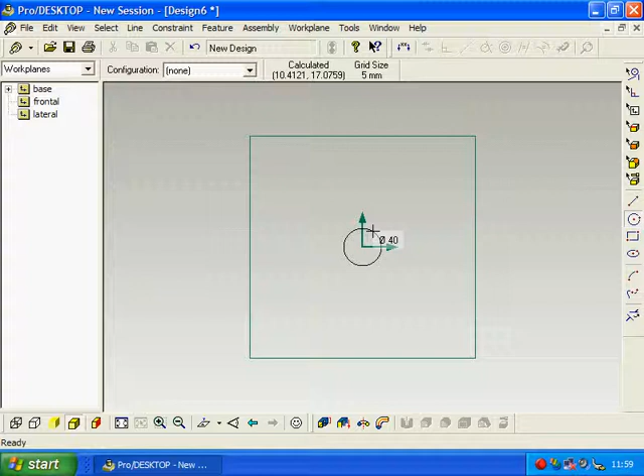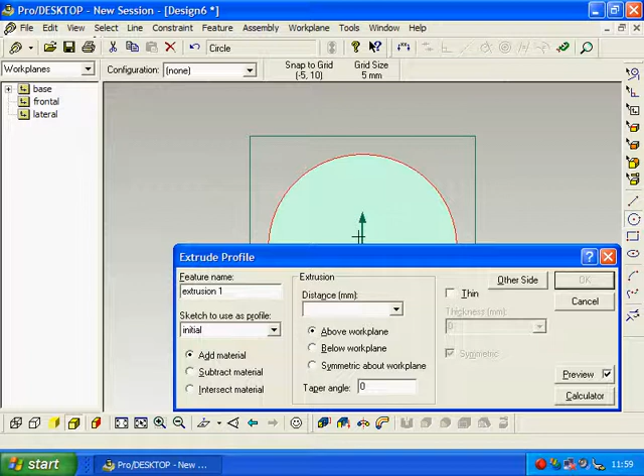So click on the circle tool on the right hand side, and we're going to draw a circle from where the two arrows meet, and I'm going to go about 200. And then I'm going to go to Feature at the top and Extrude. Feature Extrude, and we'll extrude it about 40. But rather than it being above, I'm going to use symmetric about work plane, so I'm going to click on that option there. All the rest stays the same, add material, extrusion 1 initial, and we click OK.

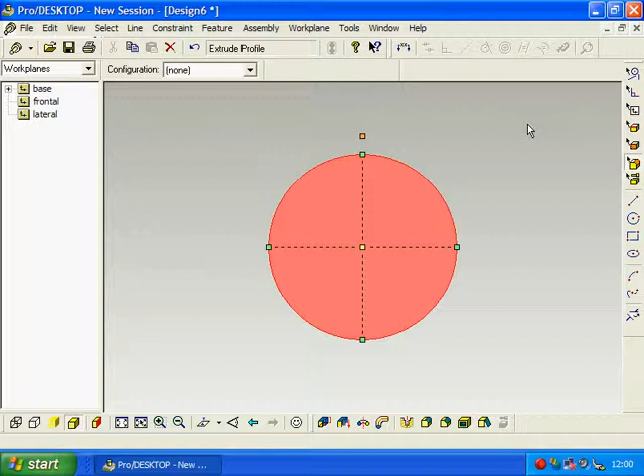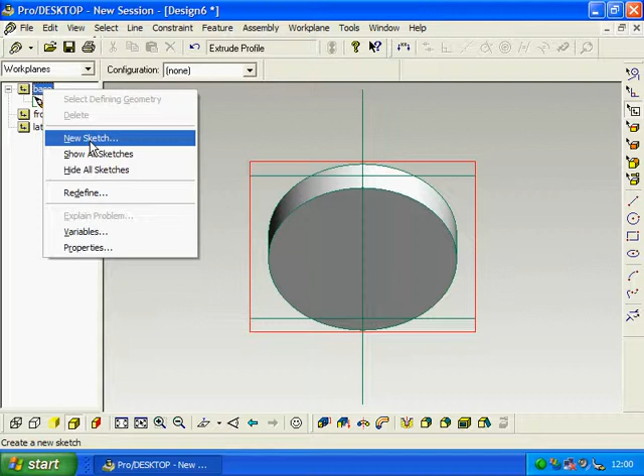So that's the first part of the job done. We've got our circle extruded, and if you have a look at the line, it's gone symmetrical about this line, so it's the same at this side as it is at this side. Our work plane sits in the middle. Next step, I'm going to add another sketch on the base work plane. So I can right click on base on the little yellow square and add new sketch. This is going to be our construction line. And I click OK.

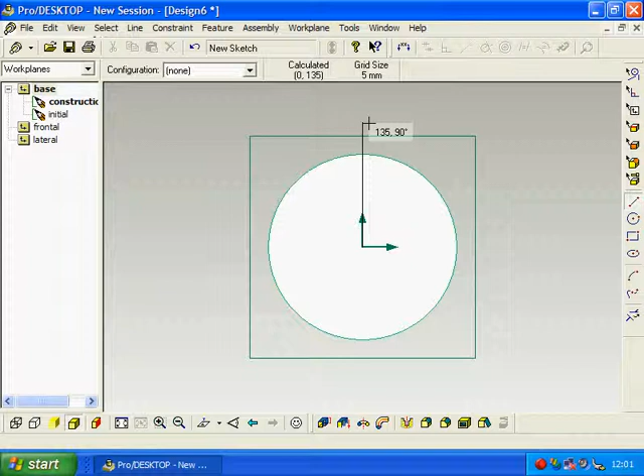Again, Shift W, and I'm going to click on the line tool. I'm going to draw a line now. This is going to be our line of symmetry for the tooth of the gear. So draw a line straight up, doesn't matter how high you go, just as long as it's above the circle. Click on line, and we're going to toggle construction line; everything there is under the line tool. And we're going to lock it in place, toggle fix lines using the little G clamp. It should be up here, and that puts a little triangle in the center, and that locks the construction line in place so it won't move around.

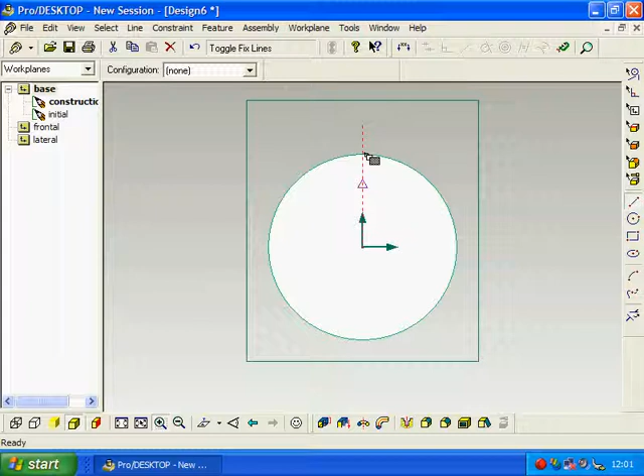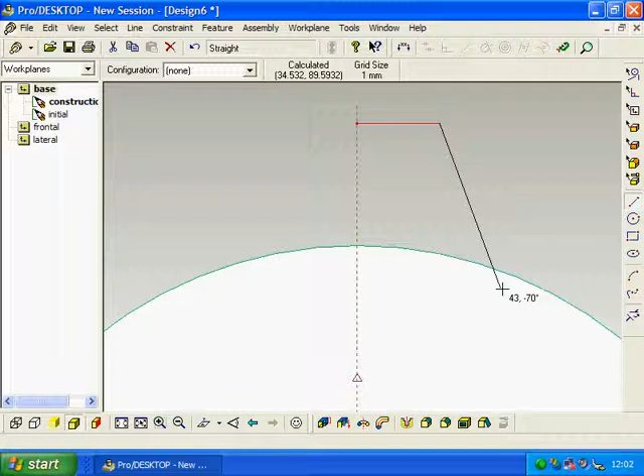I then need to draw the tooth, so I'm still going to work on this construction line layer, and I'm going to zoom in using the little magnifying glass up at the top. I'm going to draw one side of the tooth. So using the construction line as a guide, Shift key to keep it straight. We'll do a horizontal line and then a diagonal line coming down. Try and get it so it goes past and inside the circle rather than snapping to the edges. As you can see, it snaps all over the place. So come past and inside the circle. Then I'm going to do a line again back to the construction line.

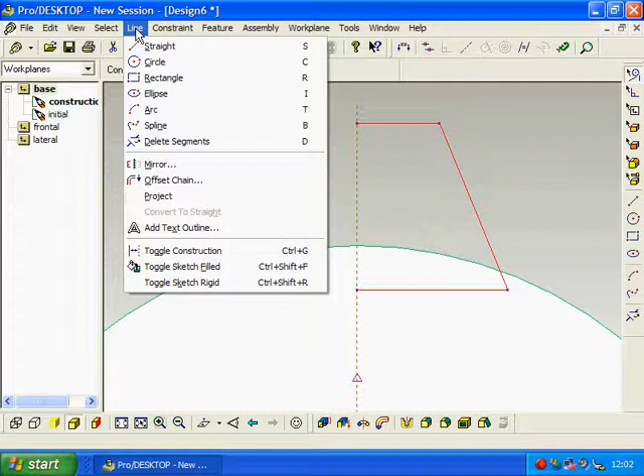I then need to select these three lines, so using the select lines tool, I've got the bottom one selected, it's in red, so Shift key held down, 2 lines, 3 lines there, all in red. I can then go to line at the top, and I'm going to use the mirror command. Click on mirror. I'm going to mirror it in the axis, which I created the construction line, and click on that. And as you can see, it's yellowed. It knows that it's going to create the line there. So I'll go back and click OK. I now have one tooth for my gear.

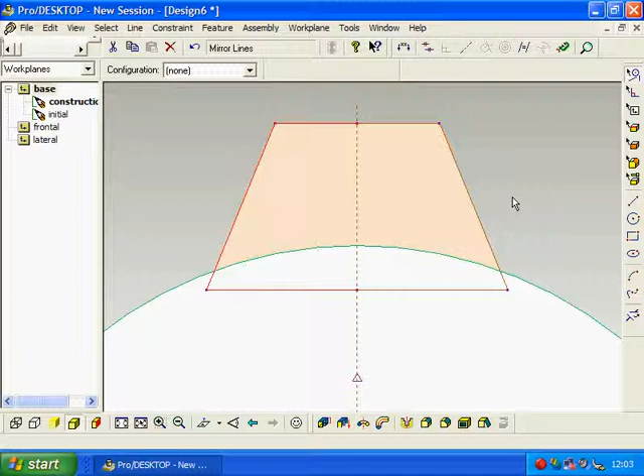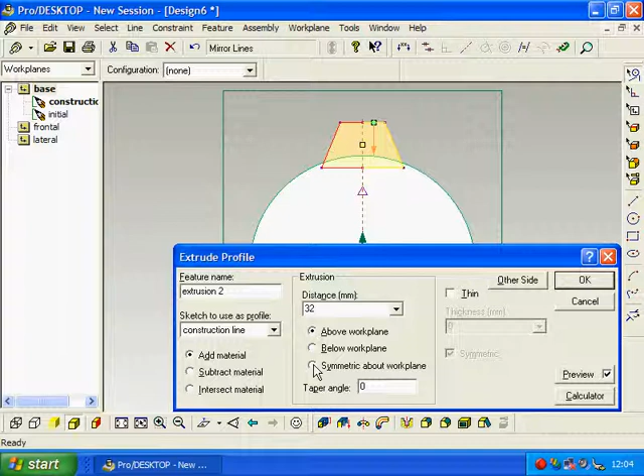So if I zoom out, oh, it's quite a big tooth there. We'll see how this looks. We can go to Feature, and we can again extrude. And I'm going to extrude it slightly less this time than I did for the circle. It won't work if you do it the same because it will blend in to the circle. So this time just select it about 32, or slightly less than what you extruded the circle. And we'll go symmetric about the work plane again, and I'm going to click OK.

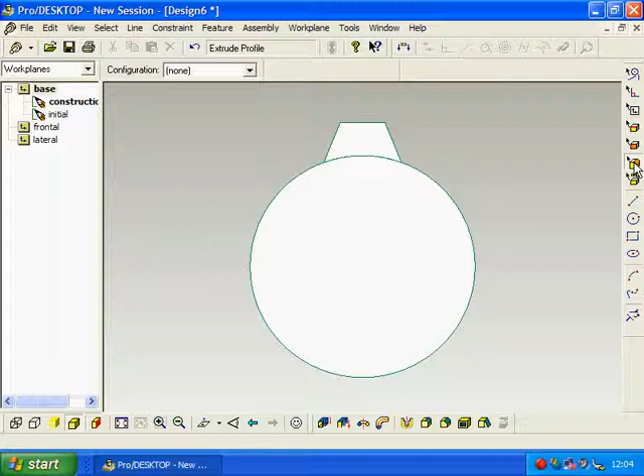As you can see, we've got one tooth, using the cursor keys to rotate it, one tooth on top of the gear. Shift and W to rotate it round, and I'm going to click back on the select lines tool, just so we can see the two separate areas. I'm going to click on the features tool, which is the sixth one down, and I'm going to click on the feature, the tooth, and that turns red. I'm then going to go to feature at the top, and we're going to use the pattern command, which is just down here.

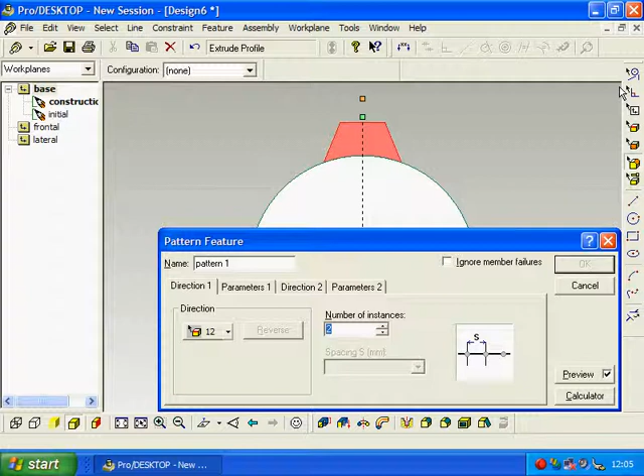The pattern dialog box appears and it looks rather confusing. You've got all these parameters we don't need to worry about. What we need to concentrate on is this little box here. At the moment, the pattern is going to be on a straight line. Now, of course, the gear we've drawn is a circle, so that needs to change. So what I need to do is go up to the top, select the line tool, and select the edge of this circle. If that turns to red, I go back to the pattern feature, and as you can see, it's now turned to a circle. So hopefully my tooth will pattern around this circle. I hope this is making sense to you.

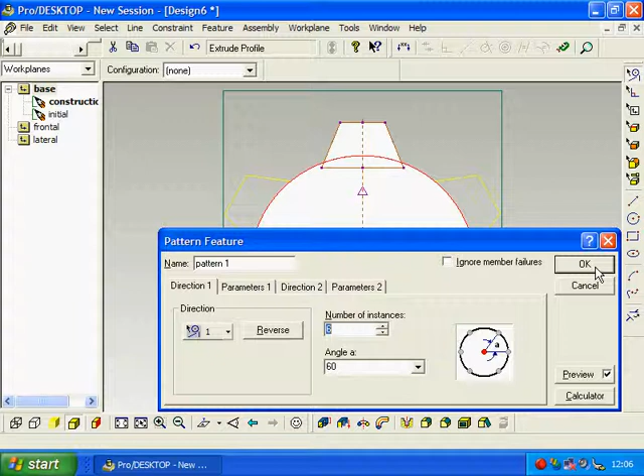We're not going to worry about instances just yet, but the angle we need to set has got to be factors of 360. So we'll start by doing one at 36. As you can see, it's a little bit out. So we'll try one at 60, and now click on the instances. We'll keep going until it gets round to the top. Make sure you don't have it so it goes onto the top one. At the moment here I've just got 6 instances, and I click OK. And there's my very, very basic gear.

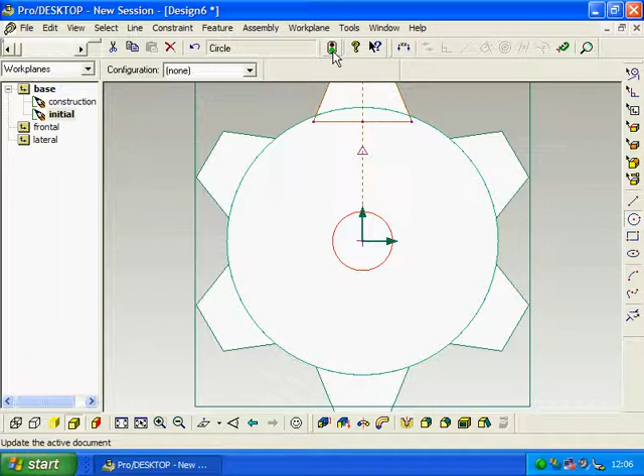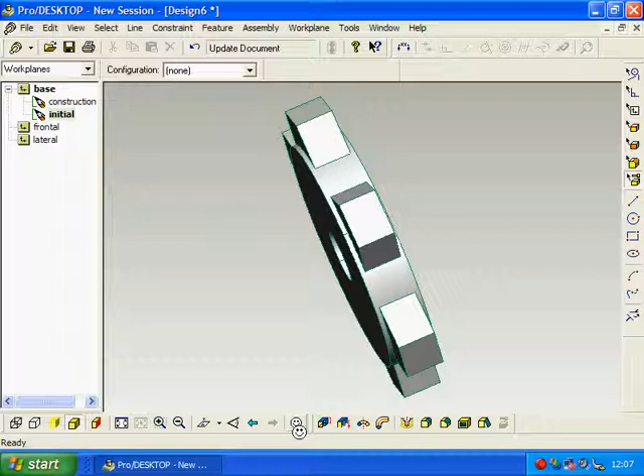Select tool, as you can see, spins round. I'm just going to finish off by putting a hole through the middle, so I'm back on initial. Shift A, Shift W, and I'm going to draw a circle in the middle, 44. Then we've got a traffic light just there. Click on that, and it will punch a circle through the center. Select the parts tool. I'm just going to make sure I've got an edge on it. Shift and A, and to finish off, just click on the smiley face, and that will spin our gear around. And there you go. That's the easy way to do a gear in Pro/DESKTOP.